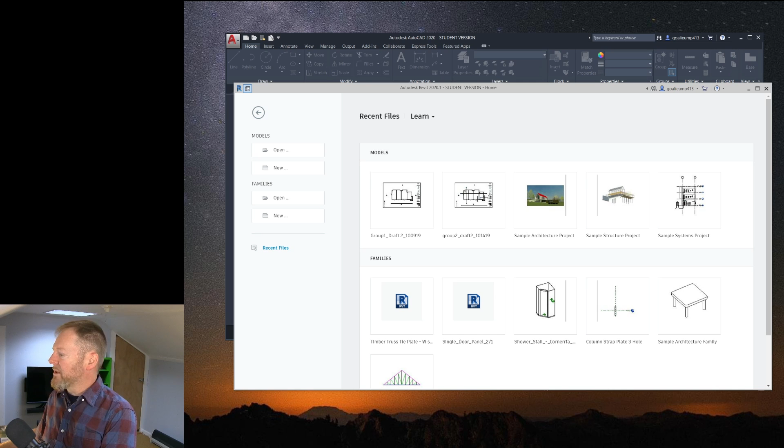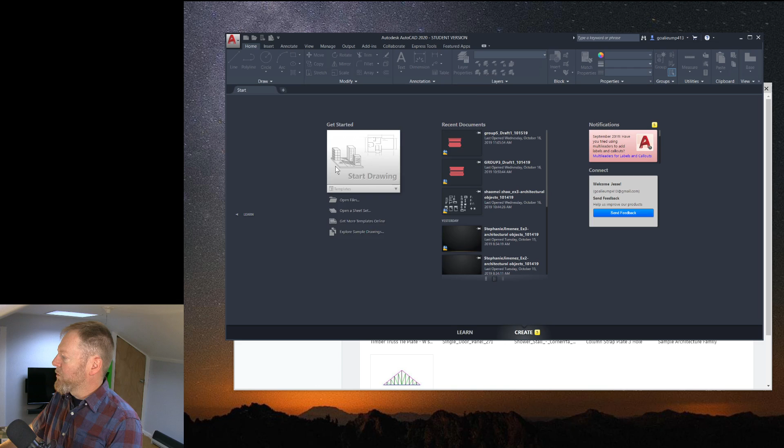Okay, so the first thing I wanted to do, let's hop over to AutoCAD. Hold on, I'll be right back, just a second. Okay, we're gonna, first of all, sorry about that—we're gonna hop into AutoCAD first. I want to show you something, and this is about overlapping geometry. It's not something that the author in the textbook talks about at all. I wonder why—maybe this was just something that they missed. But it was something that was definitely drilled into my head when I was a student in this class a few years ago, so I want to share a couple of ideas with you. I'm going to start a new file, and we'll just use the normal ACAD template like we always do.

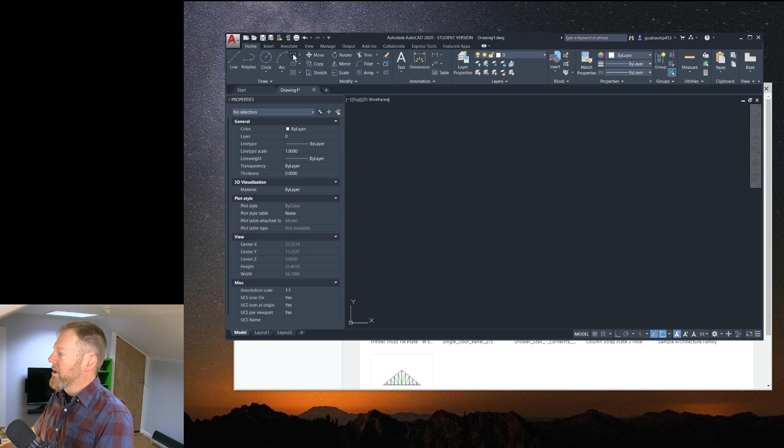We will do our main housekeeping responsibilities by turning off the view cube, I turn off the grid, and then I set my units. So I'll do that here—I'll set that to architectural from decimal, okay? And when we're done, what I want to do is draw a few basic objects here, and I'm going to show you the concept of overlapping geometry and why it's not such a good idea. I've seen this in some of the architectural objects assignments some of you have been sending me. I haven't really commented on it too much, but I wanted to take a few minutes here to talk about it. So let's go ahead with a rectangle tool first—I'm just going to draw a rectangle of some random size right now.

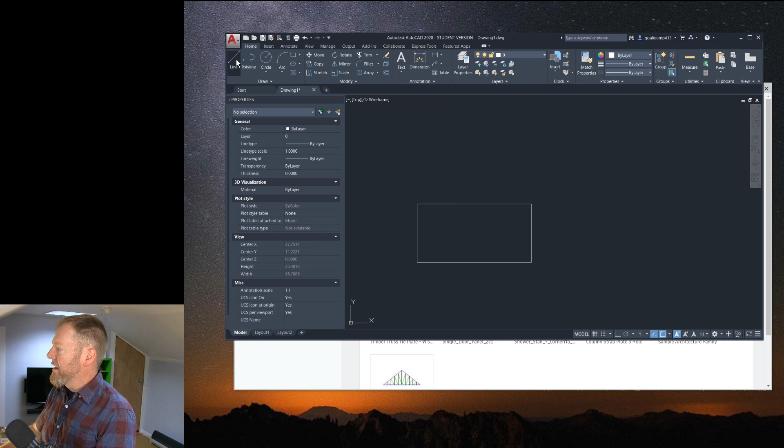I will draw a line and make sure my object snaps are turned on. Let's draw that line all the way across the top of the rectangle. I'm going to recenter the view here so you can see this.

Notice there's almost no way to differentiate whether there's a line here or that's just a rectangle. Everything looks the same. Sometimes you'll see extra line intensity if multiple lines overlap each other - it will look more bold or electrified. Right now it's very hard to see, and for those watching the stream, it's probably impossible to see that there's an extra line over the top.

Generally how this works is the latest thing you did - that line we created over the top of the rectangle - is going to be just a little bit above in the order of sequences. So if I select up here, I'm going to be selecting the line, not the rectangle. I would select the rectangle somewhere else where there's no line over the top of it.

If I'm in the mode of trying to eliminate overlapping geometry, I need to get that line out of there. Let me pull this over a little bit so you can see a difference. It's probably easier to see zoomed out than zoomed in. That line is now in this space right here. If I hover the cursor, you can see how it becomes more intensified or bolded as I hover over that line. This result of your drafting is not a good idea.

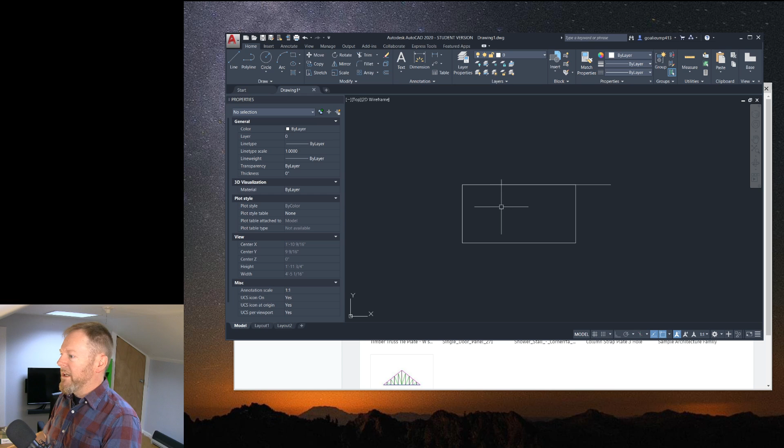Maybe you have another one here - I've drawn another line from this corner over to that other endpoint. So now I've got a rectangle and two lines, and it's again pretty hard to tell if there's any overlapping geometry because AutoCAD isn't showing it to you very boldly. There's a little bit of intensity going on here, you can see some of this line work. In my eyes, I can see some breakpoint right about where my cursor's vertical line is.

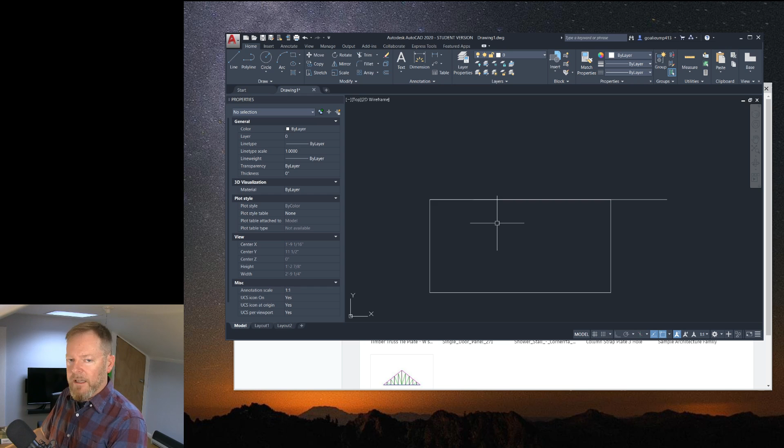But again, overlapping geometry is bad drafting practice because it's concealing the geometry below it. That's probably more important - it's the geometry you put in there in the first place. So, not a good idea.

So how do we get rid of these things? Let's take these two lines we've drawn and move them out of the way so I can show you what I'm going to do. There's a quick trick if you want to turn both of these lines into one, so there's no longer any crossing over. The simple way to do this is to select both lines and then type in the word 'join' right from model space.

Now that entire line, or both of those lines that were crossing over one another, are turned into one line. The endpoints are still located in the same position they were before.

Effectively, all this is doing is eliminating any overlap.

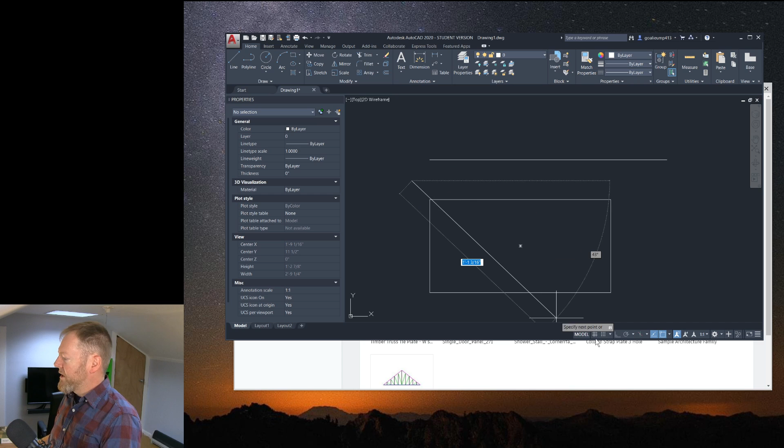Now the join command is also useful if you have two line segments drawn. I'll turn ortho on here. I'm going to draw one line, then move over a little bit and draw another line segment. If there's a gap in between the two, let's open this up and move that gap over. There we go, so I've got two lines here now. Actually, I have a third one—I'm going to delete that.

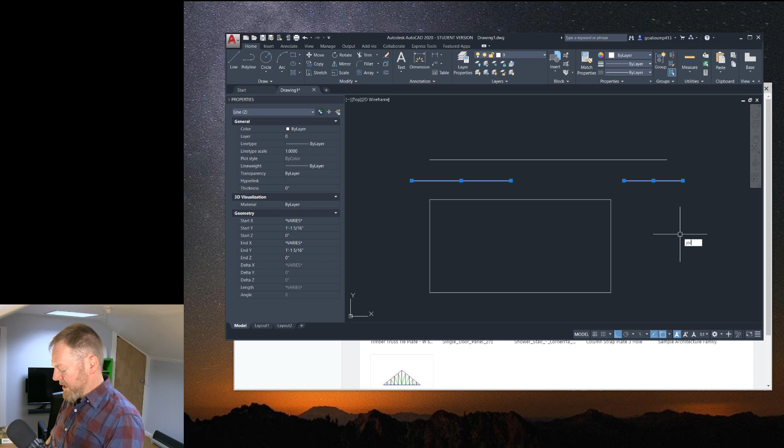If I have two line segments, but they're collinear—they share a horizontal plane, or maybe they're vertical, or collinear in some fashion—I can do the same command. I can take both of these lines, select them with a crossing window, type in join, and now they are merged. So anywhere there was a gap before, that gap is now gone, but the endpoints of the original lines are still in the same place.

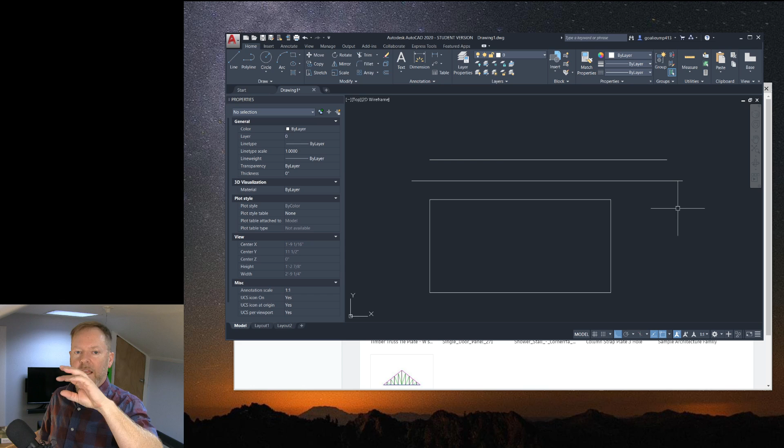This is going to come in really handy for people working in AutoCAD on Homework Chapter 4, where you're starting to create the floor plan geometry, and there's a chase down below in the south wall where you'll be creating a cutout area for a fireplace, the chimney, and the fireplace flues. The join command can quickly bring two line segments that may be touching, have a gap, or be overlapping, and bring those together so you have only one line there.

The textbook doesn't talk about the join command, but it's really beneficial—really nice, helpful, quick, easy. I'd suggest using it wherever you can. The catch is that the line segments need to be collinear to make it practical; it won't help any other way. That all dovetails with this idea of trying to eliminate overlapping geometry wherever possible.

Some assignments I've been receiving, especially the architectural objects assignments, have a lot of overlapping geometry. I've seen a lot of it and commented a little, but it's not a critical issue right now—we're getting into this a bit more at a time. Now that you've pretty much passed that homework assignment, which is due tonight, and most of you have turned it in, you get into chapter 4 of your homework where you're working on floor plans—more serious drafting in residential planning and design.

Overlapping line work, or overlapping geometry as it may also be called, is a big no-no. Do not do it. Don't get into the habit of thinking it's okay to keep drawing line segments just to meet certain expectations, like hooking a line into a corner. You need to clean up your geometry so it's the bare minimum amount of line work necessary to create the shape.

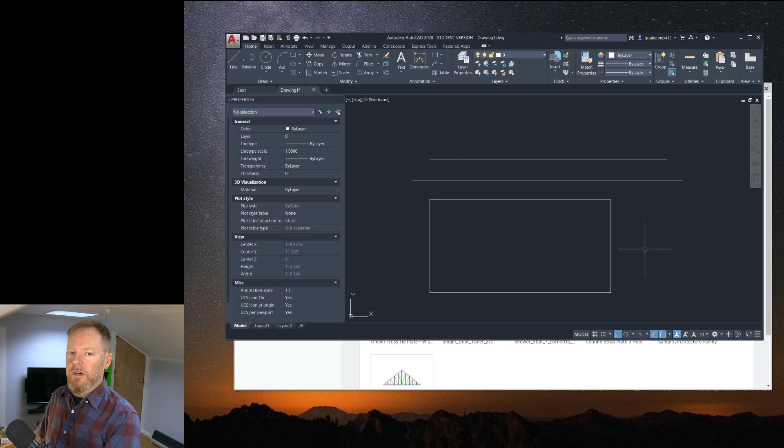It's pretty important to focus on this stuff, but not right away in the class—that's why I put this off until a little later on. You'll see this more and more as you move forward. It's not a huge deal, not the end of the world if it's there, but you can always go back into an assignment afterwards and clean it up, making sure it's taken care of.

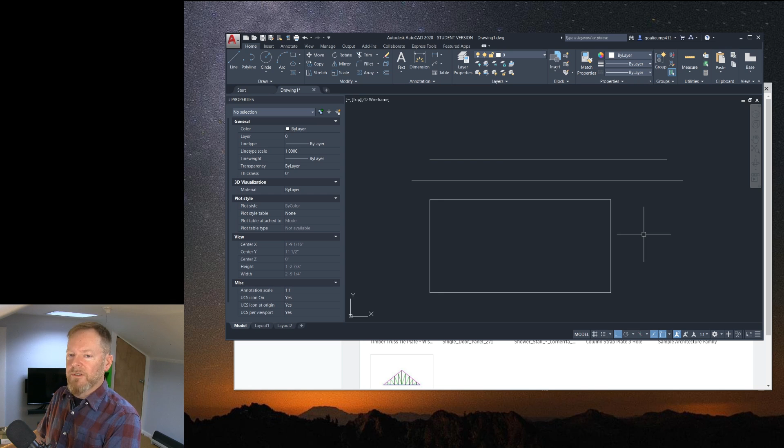There are a few other things. Today we covered a little dimensioning work in the face-to-face class, and I don't think we need to add much content there. Dimensioning, after dimension styles and text styles were created, is very simple, so there's not a whole lot to say about that—that's pretty much in the past.

For those of you watching online, if you're watching this now or shortly thereafter and about to turn in that daily exercise—since for you guys online it's due just before midnight—please make sure you're following along with the video pretty well. The one thing to pay close attention to when working on these daily exercises is to try to be a little more experimental if you can.

So err on the side of trying something else. Just try one or two other attempts instead of the bare minimum, because quite frankly, it's just better for you to spend a couple extra minutes in the file to work on a few things. All right, so let's get moving forward with a couple elements here in Revit.

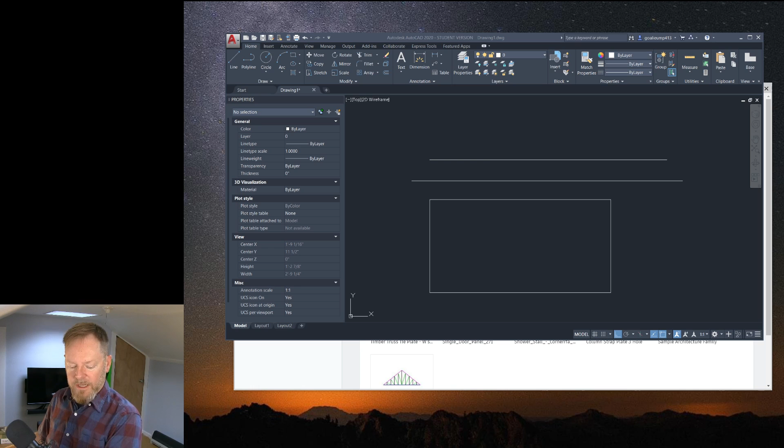Okay, cool. So anyway, back to Revit for a moment. I'm going to minimize AutoCAD. What I've been noticing in the use of Revit is that everyone is doing, first of all, a great job. I wanted to tell you that. It's not that it's amazing, I actually expect that you would do a great job, and you really are coming through really, really well.

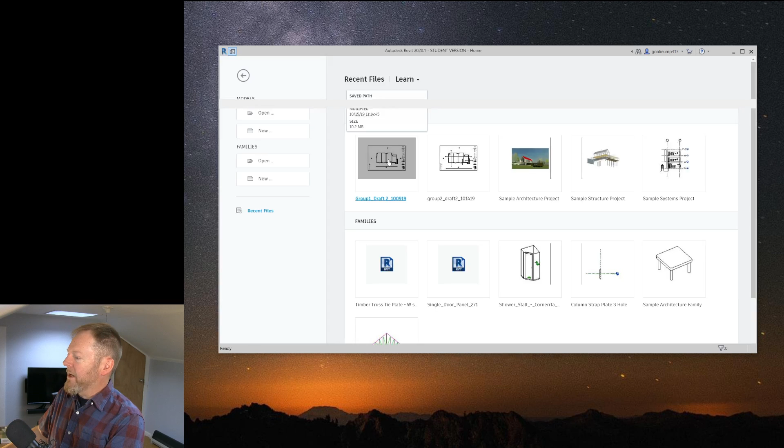As your group project work gets going and you're past the first setup assignment, you'll notice there's a speed issue going on in your Revit group project. Your assignments might take you very little time to finish, but I'm going to still pace them out week after week so we can have good communication back and forth. I'm going to open up this one right here. This is from group 1, whether online or face-to-face class. I want to open this up and show you a couple things moving forward into the next assignments.

What's interesting, let's take a look at level 1 floor plan right now, just the view itself, not the sheet. I'm going to zoom in here. A couple things we discussed back in the fall is that there are some elements like this wall, these curtain walls, the doors, and some other elements that some students negotiated and asked if they could be changed.

What I tried to do is limit the amount of exterior wall changes to this building, because if you think about it, the building would be owned by an individual or a group, and making changes to the exterior or perimeter of the building would likely cause a lot of permitting to happen, at the cost of the building owner. So the goal was to limit this a bit, to try to keep everyone focused on interior design and all the structural elements, where walls were, doors were, and so on. That was the main focus.

But I'll talk with you again - I'm telling you right now that some of this exterior wall, some of the south wall right here, is probably okay to edit. Not these walls right here, not this actual exterior brick on metal stud wall. No, that's not available to edit, because a real building would have been built with all kinds of structural members and components that are purpose-built so they're in exactly the right place so the curtain walls can span the exact right distance and height. So that stuff's not really negotiable.

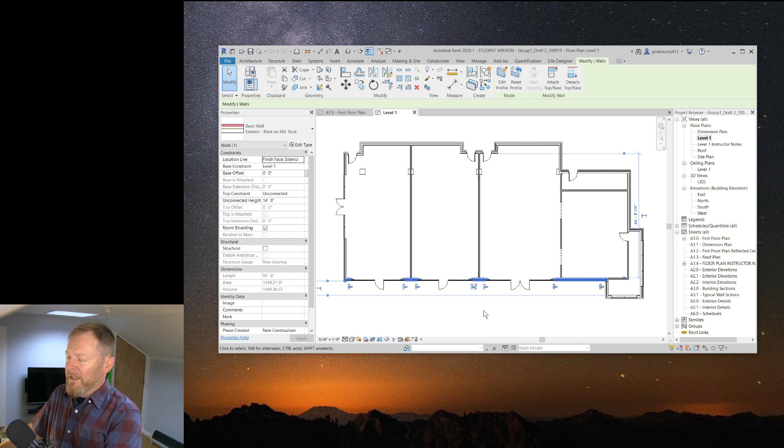What would be changeable is the information shown here - I'm going to zoom in on that. That would be a curtain wall and the door. So for example, if your group wanted to do a little bit of changing to the building itself, let's take a look at this in 3D so you can see what I mean. If you zoom in on this curtain wall and say, you know, these curtain walls are great, but could I maybe fill this curtain wall in with the same type of wall here? For some of this, I would probably say okay.

If you plan on using it for some real good reason, you want to change these walls, go ahead, that's up to you. But the actual structural wall itself, now highlighted in blue and transparent, no, you can't cut away any more of this. You can't change any more. You can add a little to it, yes, but you can't take any out. So that's the first thing.

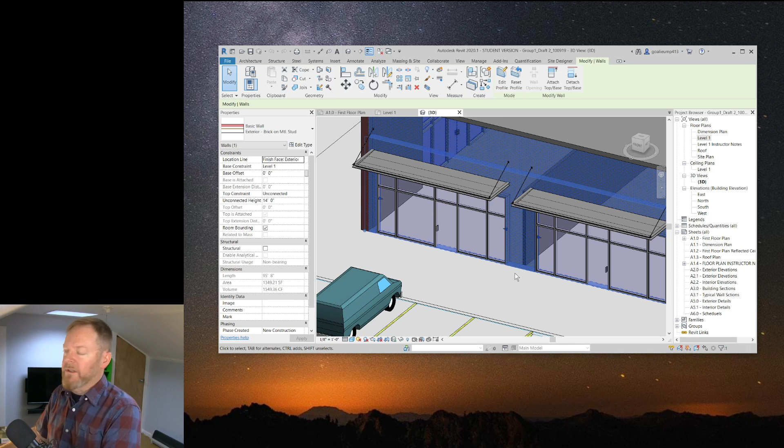Now, for anybody working on this right now, you're starting to think ahead. What kind of business activity is going to be in this building? It may make sense to make some sort of wall change here, but again, the only changes available would be right here where the curtain walls exist, not anywhere else. Just want to make that clear, okay?

Let's go back to the level 1 floor plan. As you get going, the main things you'll probably remove are these 3 partition walls right here. Those partition walls divide up the spaces into separate units that small businesses would use. So this could have been 3 or 4 units, 3 or 4 businesses operating in this building. But the project is now narrowed down to only 1 business operating here, so these walls have to come out. That's the first thing to demo or demolish. All you need to do is select them and click delete and they're gone. That's all you need to do.

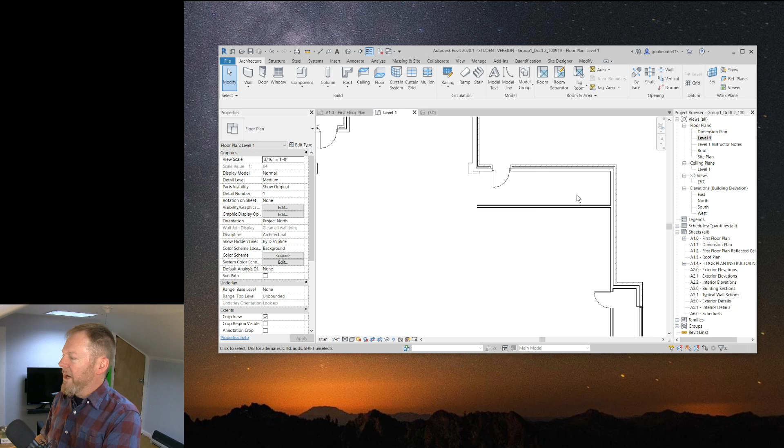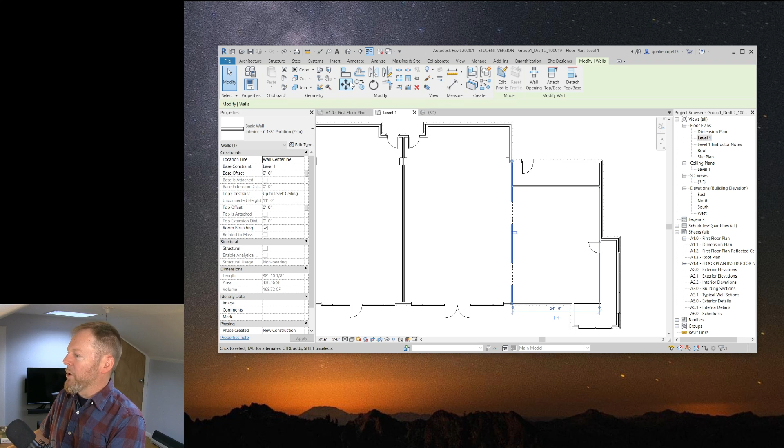But notice that we've created a little bit of a gap right here. This space back here is a utility room, a place for things like conduits, ducting, electrical panels, security and safety systems, and fire suppression systems - all that equipment would be back here. So in theory, if I hit Control Z, I'd probably want to bring this wall back instead of deleting it. I'd move this grip, or go up to the split tool and split the wall maybe right about here. Use the split tool, click modify, delete the lower portion, then modify this wall with the trim and extend command right here. Click and click, click modify. So this is the end result.

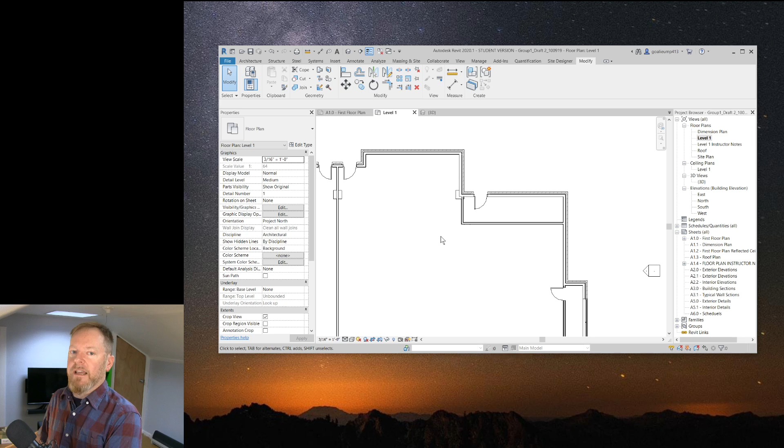Now I've got a video and other instructions in your assignment about this. I'm just letting you know that this wall and this wall, these 2 walls, effectively need to stay in place and cannot be changed or interrupted in any way, because that equipment in the utility room is a requirement for the building's operation. If you break into it for any reason at all, the fire marshal's going to tell you no, red flag the work, and you'll have a very upset client.

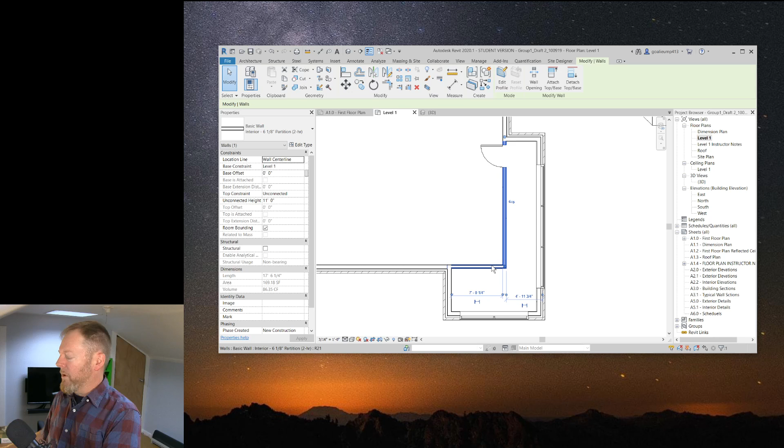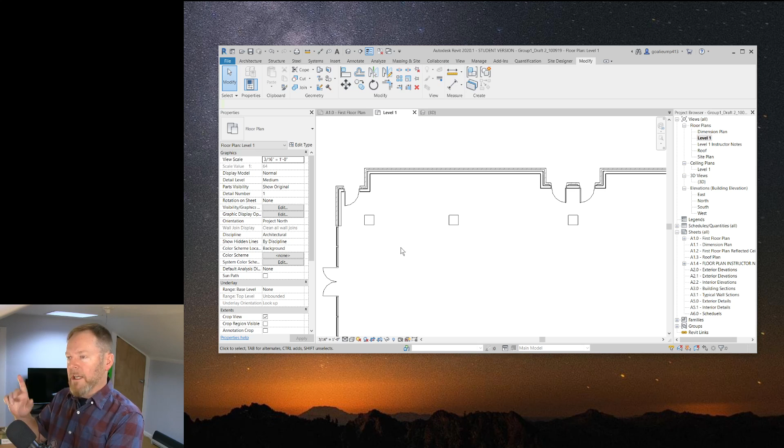Other things in here - let's get rid of these for a second - things like these pads, if you will. That's where the pads for the posts holding up the roof need to stay in place. These are going to actually be columns, and we have to make sure something is holding up the roof above. We'll go back to that 3D view, and you can see there's some room up here. These walls I've added way back at the beginning of this building design - this is where you might have HVAC, roof-mounted equipment. So the columns inside the building have to hold up part of that roof because those elements have weight. Otherwise, the roof would collapse, and obviously that's bad. So they have to stay.

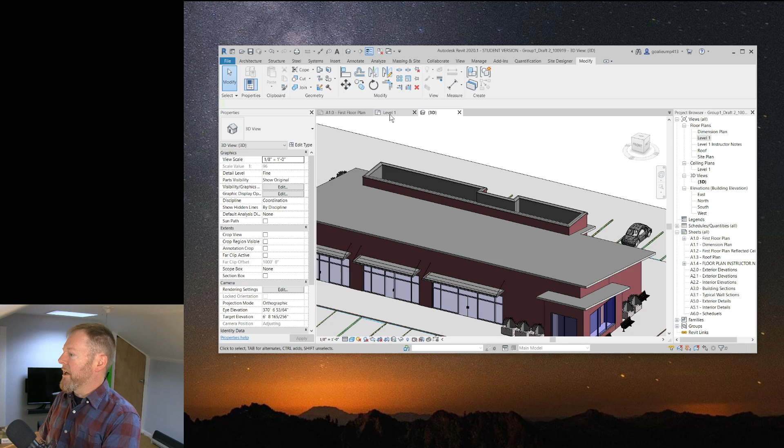And then the back doors here as well. These rear access doors are going to be for, say, service entrances or employees coming in and out of the building, things like that. Those doors have to stay in place just as they are, so they're not open and available for editing. But essentially, this is the sum result of what will happen as soon as your group is ready to start demo and start design. Okay, so quick primer on that.

So let's see, what else is there out there that I wanted to mention right now? I'm kind of walking through a lot of things pretty fast here.

My coffee's already getting cold.

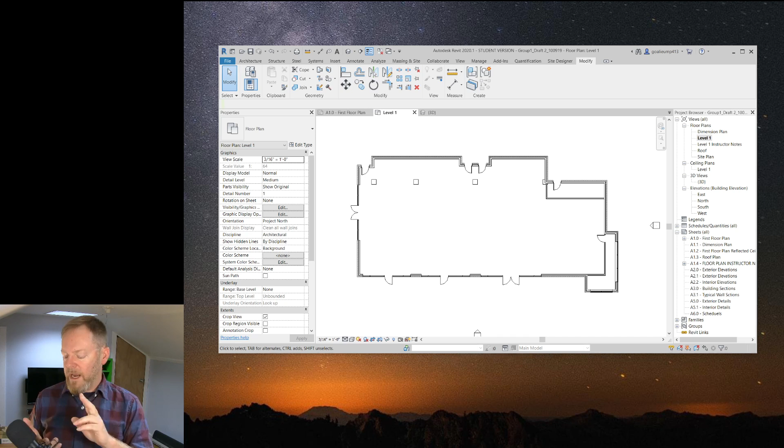They're trying to get you to be honest with them, but they also want to see it visually. So my suggestion would be a couple of things, for everybody in this class watching, and I'll say this in the classroom as well, probably on Monday.

Don't ever allow your files to get lost. Because if you save an earlier version of a file that has really hardly anything done to it, and maybe the next one has a lot of work, but it's rough, bulky, doesn't have any dimensions, things are in the wrong place, and so on.

If you save that work, you can then use it later on in that interview to convince the person or people you're talking with that you actually had to start from an earlier rough design, something that made absolutely no sense at all. You couldn't figure it out, but you resolved it, and here's how. And you can prove it, you can show it to them, okay?

But most of the time, the final finished product, that final rendering that looks gorgeous, it's a perfect perspective rendering with all kinds of entourage in it, trees and foliage and mountains and blue sky and everything. That's a very nice looking image, but oftentimes that's the last thing, most of the time, that you will create.

So for most of the work you'll be doing in a professional office, it's everything before it. So if your potential employer, the person or people interviewing you, can see the way that you resolved problems, and they see progress in your work over the weeks, days, or hours, whatever it took, then they know, hey, I have a candidate sitting in front of me who is not only smart enough, brave enough, but honest enough to show me their work in a rougher, earlier version.

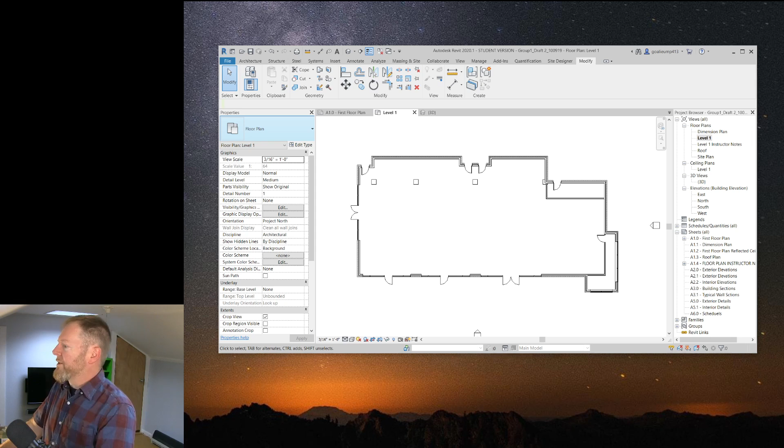I've had some questions in class about various AutoCAD and various Revit things. Remember—how should I best put this—remember that the two applications, although produced by the same publisher, are radically different in how they arrive at the same conclusion, right? And you guys know this.

So everybody, all of you on the online side of the universe that are watching this, remember that you may not have seen it yet, okay? But if you're in the face-to-face class, you've heard me talk about Revit a lot, and vice versa with AutoCAD, so it's a little bit more straightforward for you guys. But for anyone who's in the online classes, you may not have had exposure to Revit yet. It's more advanced, obviously. It's a modeling application versus a drafting application and so on.

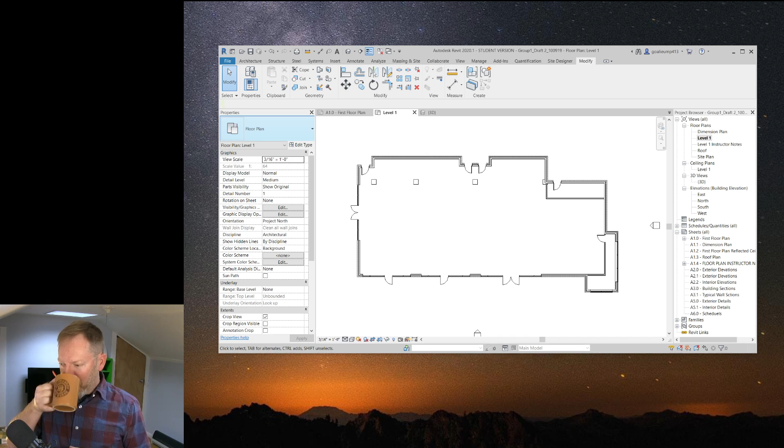Yeah, cooling off a lot.

So after the brief monologue there about registering for class, there really isn't a whole lot more I wanted to talk about in terms of expressing certain things. Again, I just wanted to say to everybody, you guys are doing a great job. The quality of work that I'm seeing across the board is really, really good. And you're getting things in on time, which is outstanding. Keep doing that. Keep working with early urgency. If you do have any concerns at all, just, again, don't hesitate.

Remember that it's more important to be as complete as possible with your assignment when you submit it, but try to submit it on time or before, so you have that second chance available. Because we're here to learn, we're not here to be perfect. That's not a great way to learn, to hold yourself to a standard that high. The best way is just to jump in, be aggressive, and explore and see what happens.

I'm always here to assist you where you need extra help, and to point out areas that need some improvement, and give you all kinds of congratulations when you guys do a great job. Some of you are just breezing through this, others need a little more help, and that's what I expect. It's working out really well. So I want to thank you guys for doing such a great job.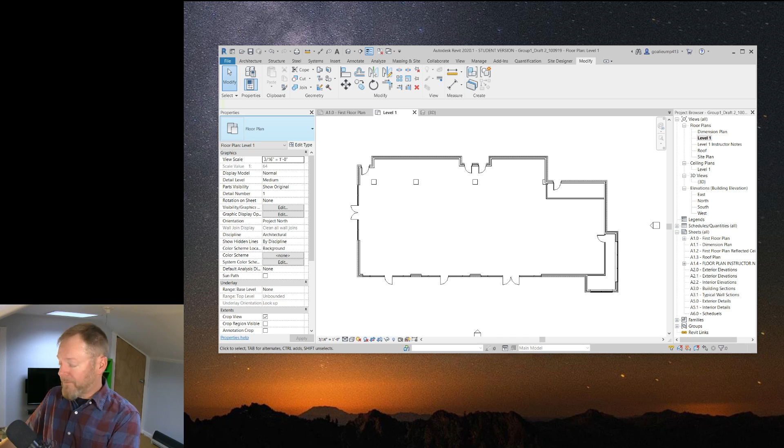Now, I won't intervene in terms of assigning a different level of points to people in your group. I don't do that. This is a group project. So if one or two people are doing all the work, but the third person is hardly doing anything at all, right now I don't know that. So it's really hard for me to assign points differently to anybody. I never will do that.

It's up to you guys to maintain that level of communication and calibrate your group dynamic so that everybody is working equitably, evenly, and continuously helping each other out. Okay, so that's really important. I had a chance in the classroom, and I always will, to talk to everybody face to face about this, but especially for you guys online, I don't always get the most chances to talk to you about this.

So please make sure tonight, before you end your day, you get that first group project assignment in. Also check the page that says either draft 1 group project or draft 2, and make sure you write me that document. That's kind of a mini contract, if you will, that states basically the names of your group members, how you're going to process the project, and give me a quick summary of how you will handle conflicts in your group. Make sure that everybody in your group sees it, okay? I want everybody to be a part of this.

It's a little easier to do in face-to-face classes, right, because we're all in the same room together. But in the online universe, that's much harder to do. We do have technology we can leverage, but that technology sometimes fails us, okay? So don't let that happen. If you do need to get something in a little bit late, I get it. You just won't have a chance to resubmit the assignment if there are a few errors here and there.